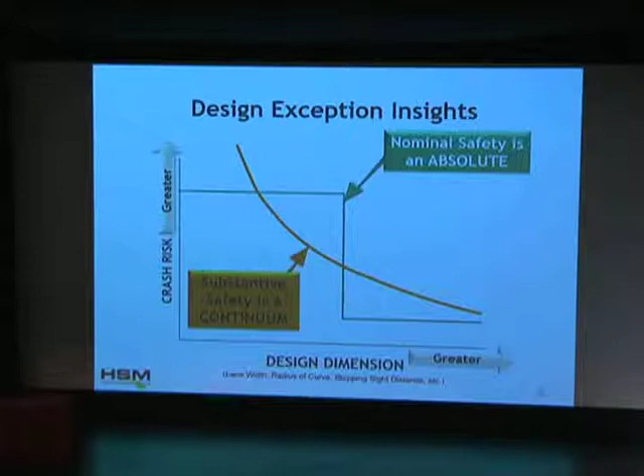As I mentioned, the Highway Capacity Manual was kind of the model that we used. We didn't make it look like the Highway Capacity Manual, but we really liked the way that's integrated into our profession. And it's not a mandate, it's a set of tools that someone can use to try and advance forward. And so that's why we really use that as our model, was the Highway Capacity Manual. It's definitive, it's widely used, but the most important one for us was the third one, which is it's science-based, it's data-driven. I might also mention that the science-based and data-driven issue was a point of contention when we were doing the preparation for the Highway Safety Manual.

We recognize that there are some things we do not have data for, and it's important to try and address those issues. I'll give you an example of pedestrian and bicycle volume. We need to know that stuff because obviously that's going to be important to the design. We don't have that information. We had to make the decision that we would try and tackle it on urban and suburban arterial roadways, and that would be the only place we could get it into the first edition of the Highway Safety Manual. Doesn't mean that we're not going to continue looking at it, it just meant that we didn't have that data.

Even if we have a method for someone to apply it, who has that kind of data in their database? And so we were trying to think about how can these tools be deployed the best way, and who has that sort of information in their data set. So essentially, we noticed that there were all sorts of project level decisions that you can make, and all we want to do is put the Highway Safety Manual as a continuum, that safety analysis is not going to be a yes or no, it's going to be part of that overall decision process.

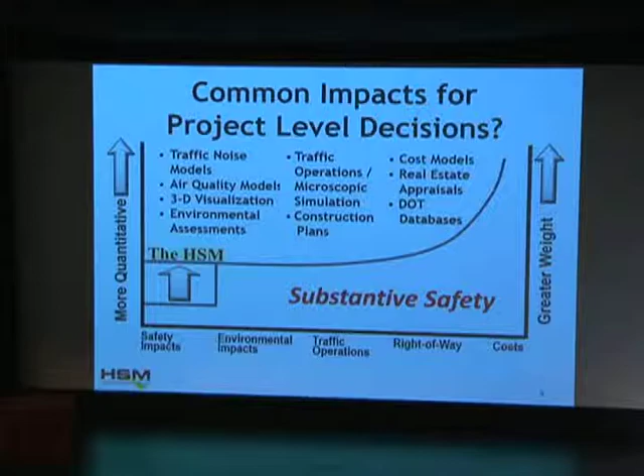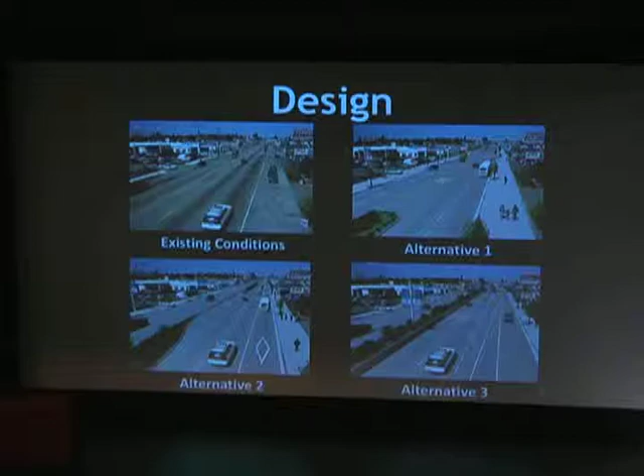But historically, we haven't had the ability to do that. So that's the reason that we tried to come up with some flexibility in the way we apply the tools. They continue to evolve so that you can have alternatives like this and be able to make quantitative decisions.

The HSM, first of all, let me ask the question, how many of you have seen or touched a Highway Safety Manual? Oh gosh, we still have work to do. Well, I didn't bring mine, or I would give you the opportunity to both see and touch, but it's 4 volumes. The 2010 release had three volumes in it, and then we had a supplement that just came out that's freeway and interchanges. So we felt like it was important to go ahead and get that out. So we have 4 volumes now.

The 2010 release had 4 parts. We thought it was going to be 4 volumes then, and so unfortunately for us, when they did the binding, our 4 parts became 3 volumes, which really confused the living daylights out of me. But what I can tell you is that Volume 2 is probably the one that people are most interested in. Volume 1 tells you a little bit about fundamentals of safety, and it also tells you about how you can incorporate safety into the planning process, a very important topic.

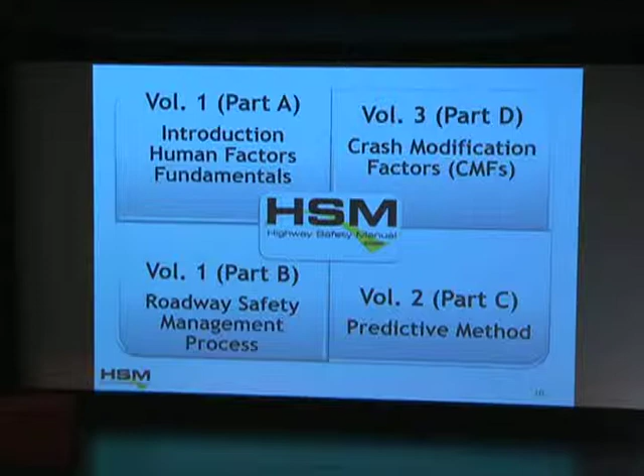Many of the tools in there we've had for years. Many are new tools that have actually come from the analysis that's in Volume 2 of the Highway Safety Manual. Volume 2 is where we actually have new ways to predict safety. And then Volume 3 is a companion of that, which has crash modification factors or functions. I'll talk about what those are in just a sec. So I said Volume 2 has these predictive methods. We call those safety performance functions, or SPFs.

And as a general rule, they have nationally derived SPFs that have multiple states. If you're going to use them for your state or your location, it's good to have either one that you've developed for your state and/or one that you've calibrated to your state, because you have some local variations. For example, some places they might have a lot of crashes with animals that are running across the road. Does that happen a lot in downtown Houston, that project we were talking about? Have y'all had a problem with animal hits? No? Probably not. But it certainly is going to be a problem in Montana. And so they have to do adjustments for that.

Or there might be a place where you have, shall I say, the more experienced driver with at least 50 years of driving experience coming there in a seasonal application. And you might want to try and understand what kind of issues you have associated with that particular road user compared to a college town like we have today.

Has anyone driven around and enjoyed the driving of the college students?

I do enjoy it as long as I'm sitting at the side of the road watching it. But when I'm in a car, it's a little scary sometimes. So, you know, if you have something like that, you need to calibrate these for your local jurisdictions. It's not a complicated process, but it is something that would be a great project for your local university to help you with. That's just a plug to try and get them some research.

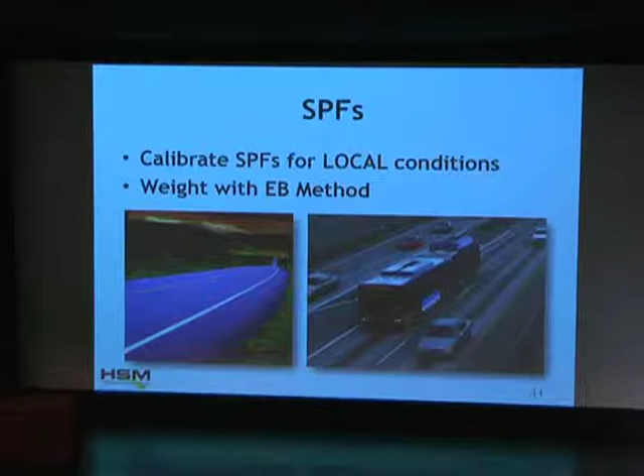The other thing I mentioned is called a crash modification factor or function. The only difference between those two is one is just a single number and one is an equation. And I try and think of it as M is for multiply. It's a way to adjust and determine if I make a change. Let's say, for example, I change my lane width from 11 feet to 12 feet. How would that affect the safety? Usually, if a CMF, crash modification factor, is 1.0, that means there is no change whatsoever. If it's greater than 1, then that means you would increase crashes. You multiply something bigger than 1. And if it's less than 1, then it means you're going to see a decrease in crashes. So your target is to try and find countermeasures with CMFs that are less than 1.

There's a great resource available for this. It's the Federal Highway Administration's CMF Clearinghouse. Later on, I have a slide that shows its website, but if you just type in CMF Clearinghouse, it actually takes you straight to that site. And it will show you every CMF that they've been able to identify, and it gives you a rating to tell you the quality of the CMFs. The Highway Safety Manual has the third of the 4 volumes that actually is all CMFs. That's all it has in there.

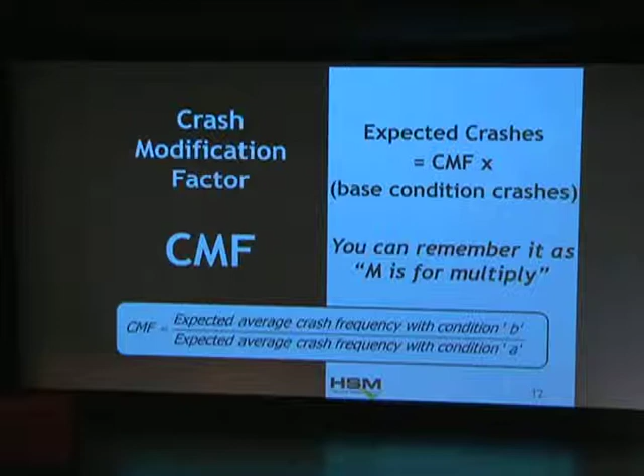In the next edition of the Highway Safety Manual, we're exploring right now whether or not it's going to stay in that current format because the Clearinghouse has such a dynamic ability to update CMFs, so we might change the way that it's presented and have it maybe telling you a little bit more about how to use CMFs rather than what CMFs are. This is just an example. If a CMF is 0.9, that tells you that you'd have a 10% decrease in crashes.

All right, so just a quick snapshot of how the Highway Safety Manual works. I don't want to go into any of the details, but I can tell you that the equations are not particularly complicated. We try to keep them straightforward. All you have to be able to do is add, subtract, multiply, divide, and if you have a calculator that has e to the power of, that's a bonus. You can probably do every single equation that's in the Highway Safety Manual.

Now, my problem is not punching in numbers into the equations. My problem appears to be pulling numbers from tables. I make lots of errors doing that. And so we've also got some tool solutions for you because of that.

So the Highway Safety Manual, we already talked a little bit about this, but really the key thing is that we want to have a tool that we know is reliable, science-based, and down at the bottom, the 4th bullet says, does not increase the risk of tort liability. So in the United States, we are protected by federal law if we're actually evaluating a site to try and improve safety. Those calculations, if you're willing to disclose them, could be used against you, but you don't have to disclose them if you're using them for your own benefit to try and improve safety.

So we had an attorney that helped us with the Highway Safety Manual. We actually had a couple of attorneys, but one of them subsequently helped me in preparation with some training materials. And I said, I need a slide on how the Highway Safety Manual will protect us from tort liability. And he gave me a slide on what the Highway Safety Manual is not. Now, I don't know if y'all have ever worked with lawyers before, but apparently this is the standard operating procedure, just to tell what it's not, and then whatever's left over is, I guess, what it is.

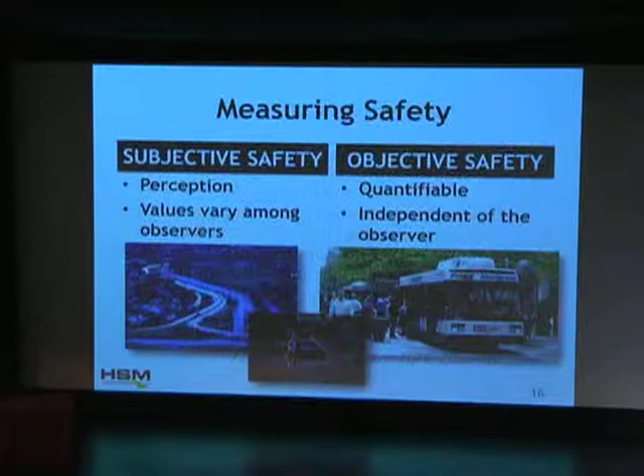All right, so in the Highway Safety Manual, the term safety is referred to as crashes, and you saw George's example a while ago where he had total crashes, and he also had it broken down by the different severity levels. And we, of course, recognize that historically we've used crash rate, which gives you a good idea about the context. If you can think about the exposure level, then it's an important thing to be considering, so you're comparing apples to apples. But what we've discovered is that crash rate really doesn't answer the questions we've had before, because crash rate was basically the number of crashes divided by some sort of a volume. And that implies that it's kind of the slope of a line.

But if we were to plot crashes on a matrix that had volume and number of crashes, what we find is it's not a line at all. Maybe you might have 1 or 2 roads that have parts that are lines, but it's always going to be curvilinear. And so that's the reason we needed to come up with a different way to do this. So these safety performance functions do predict crashes, but they predict crashes in the context of the traffic volume on the facility.

I have had a few people tell me, well, the thing is that crashes can't be predicted. And for years, I've been told that crashes are both random, and they're rare. Have y'all heard that? Crashes are random, and how can you predict something like that? Something that's random and rare.

Well, the basic idea for a random crash is I can't go out and stand on the corner and say, all right, last year on Wednesday, between 10 and 10:15, there was a crash at this corner. So tomorrow, between 10 and 10:15, there's going to be another crash. Can I do that? If I could, I'd want to go to Vegas and use my skills for other things, probably not predicting a crash on the corner.

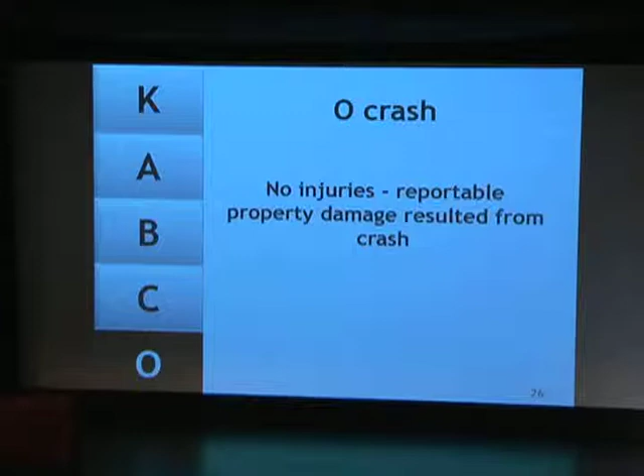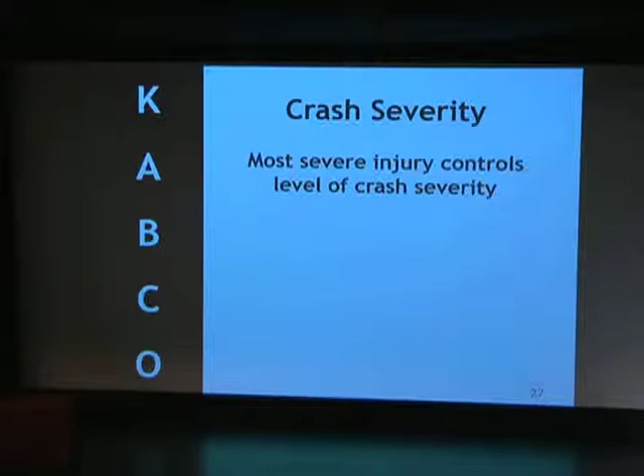It's just a problem with even the crash data that we do have for law enforcement officers. So the crash severity is the most extreme of all of those that happened for that particular crash. So if you had a crash with 1 person killed and 2 people injured, it would go down as a K crash.

All right, so having set that groundwork, I just want to talk real quick about the available tools, and then I'll wrap up for the Highway Safety Manual. In Volume 1 of the Highway Safety Manual, in the planning process, they have a large number of possible methods that you can use to do safety assessment. They don't have this big arrow on the side that says greater reliability. I just tossed that in because that's what it means.

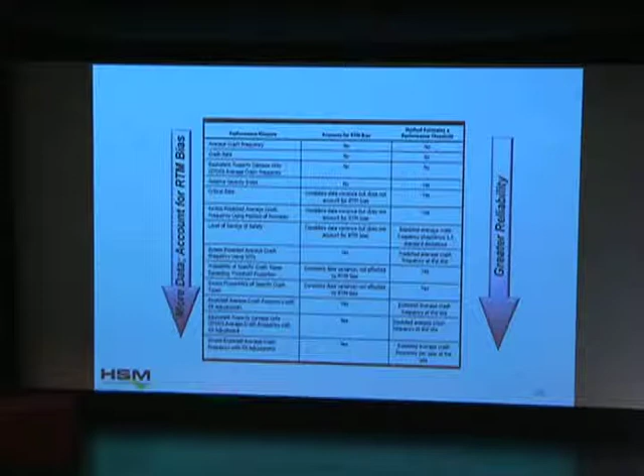You start at the top, which is average crash frequency or crash rate, the things that we've historically used. And those don't need a lot of data. You need some, but they don't need a lot of data, but they aren't very reliable. And as you go down this table, the more data that you get and the more data-driven the procedure, the more reliable the results.

Another way to look at it is, I know that the print is pretty small on this, so I'll just explain real quick what this describes. There are essentially 6 procedures suggested in the Highway Safety Manual for doing analysis. 2 of them are very basic procedures, and so one of them is called perform a relative comparison of CMF analysis.

So if you don't even know what the number of crashes are, you can just look at 2 CMFs. Like, I want to maybe widen a lane or widen a shoulder. Which one is going to have the greatest improvement on crashes? So that would be a relative comparison of CMFs. It doesn't need as much data. It's not as reliable, but it still gives you a good sense of what some of the effect could be, because those CMFs were based on some data.

The second one would be perform an observed crash frequency using CMF. So basically, you take your CMF, you multiply it times your historic crashes at that site, and say, if everything else stays the same, I can expect to have this number of crashes reduced. There are some issues with that method because typically things don't stay the same. It doesn't account for geometric characteristics or changes over time, but it still is much better than what we used to do.

So those are the basic methods. They're probably the methods I see used the most because they're simple, they're intuitive, they don't need a lot of data. And they're still much better than what we historically have been using.

The next 2 that I have here both use safety performance functions from the Highway Safety Manual or from locally derived safety performance functions. And they then have to have a little computation with an equation. And then the difference between is one of them adjusts with CMFs and one of them doesn't, depending upon the format of the SPF. So that one, you kind of need to use the Highway Safety Manual. And the third one is also similar. You're going to have the SPFs, but now it uses the EB method.

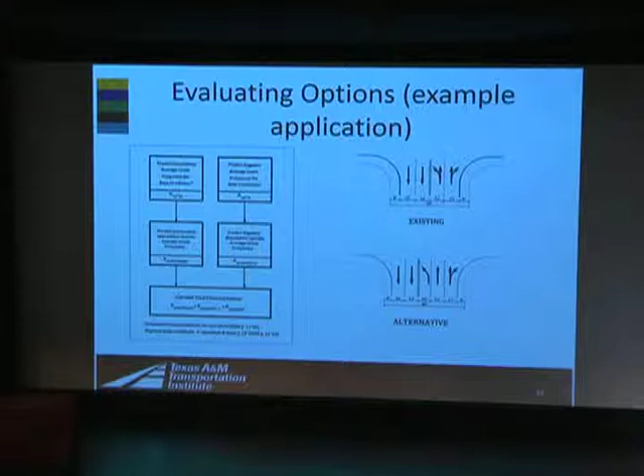You have to do a calculation for the effect on segment, which is going to capture things like lane widths. You have to do one for the effect on intersection, which is going to capture things like turn lanes, and then you just add the two together. So you have to remember to do both of those and add them together. That's probably one of the more common errors I see.

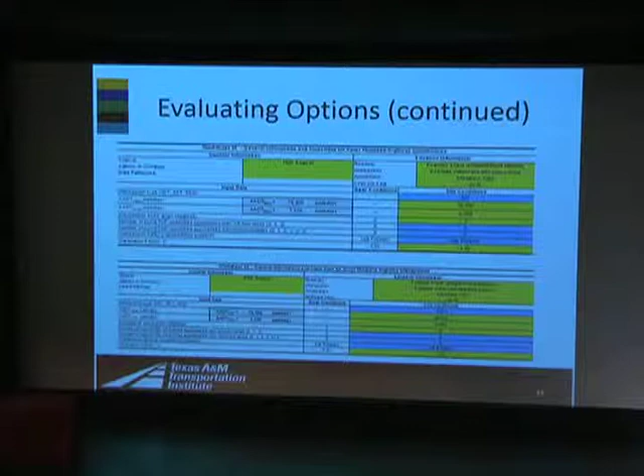This is one of the spreadsheets, and really on this one all you do is you just input your geometric characteristics in the very top form, and then you can scroll down and play with all the numbers, play with options if you want. On this particular one, it would then give you these solutions, and so you could just add the intersection and segment crashes, and it would tell you the total predicted crashes for total crashes, and then also did it for FI crashes.

And then you would want to try and make sure that you know which one is the more important one there. If you have, for example, two that tied for total crashes, but one of them was more clearly better performing with the FI, that's of course the direction you would want to go.

So some other resources that are available. In addition to the AASHTO site, there are some NHI courses that have been developed which are really great. There's an overview course. The one that I like the best, it's the most recent one, so that's probably why I like it the best, is the Crash Modification Factors Workshop. They've given a pilot of it. I think they're now ready to roll it out and start giving it widely. And it's a really great course. And the gentleman who at least gave the pilot, Frank Gross, did a fabulous job with it.

You can also get other information from the Clearinghouse. They actually have several resources that they've developed for the Clearinghouse. ITE recently developed a document that's called the Integration of Safety in the Project Development Process and Beyond: A Context-Sensitive Approach. That example I showed you a minute ago is actually in a draft format for a product that FHWA is in the process of finalizing, which is also how you can incorporate the Highway Safety Manual in the project development process.